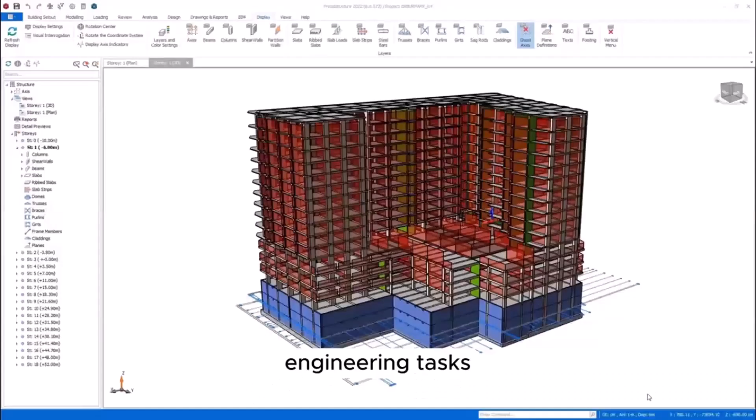Are you ready to discover ProtaStructure Suite? This comprehensive structural engineering software comes with 4 specialized modules, each crafted to efficiently optimize your engineering tasks. We are excited to introduce to you ProtaStructure. This innovative solution is designed to offer fast and accurate analysis and design for your building structures.

Imagine transforming the way you work with ProtaSteel, our groundbreaking tool for automated connection design and steel detailing.

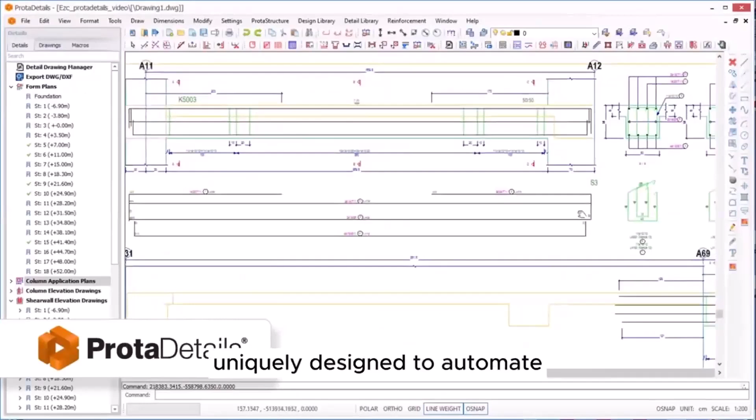That's not all. ProtaDetails is a revolutionary structural drawing and detailing software, uniquely designed to automate the creation and organization of your structural concrete detail drawings. And all of this is achieved with just one click.

And let's talk about collaboration. Our ProtaBIM feature is a game changer in coordinating and sharing project models. It's designed to enhance teamwork and ensure that everyone is on the same page. Minimizing project delivery time and increasing efficiency is central to our mission.

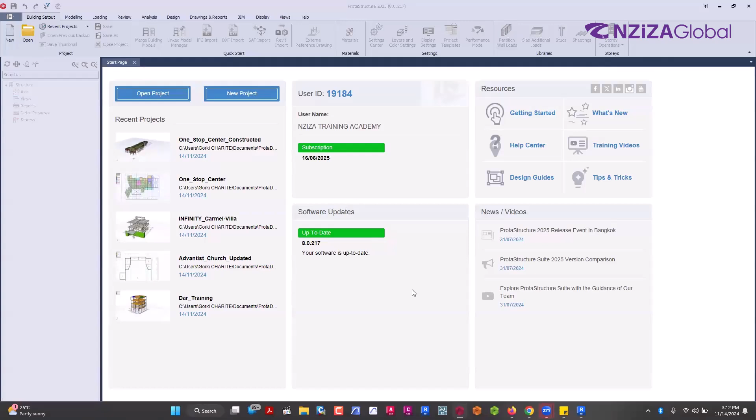Thank you. Okay, good. So we'll be together in today's demo, and I'm going to demonstrate the capability of ProtaStructure. So this is how ProtaStructure opens. This is the latest version, the 2025 version. If you can see my cursor here at the top, you can see that I'm using the latest version, which is 2025. So if there are some participants who are familiar with the software, you can see that there is some change with the new version here.

Okay, so starting here at the top, we have different tabs. You can see this building setout is one tab, modeling is another tab, loading is another tab, and so on. So we have different tabs here at the top, and within each tab, we have different tools depending on the tab that we have opened.

Then here in the middle, you can see we have the start page. With the start page, you can open a project. This is used when you have an existing project in your computer that you want to open, or you can start with creating a new project. Then here we have a list of the recent projects that you have worked on. You will have information about the software update and the licenses that you have.

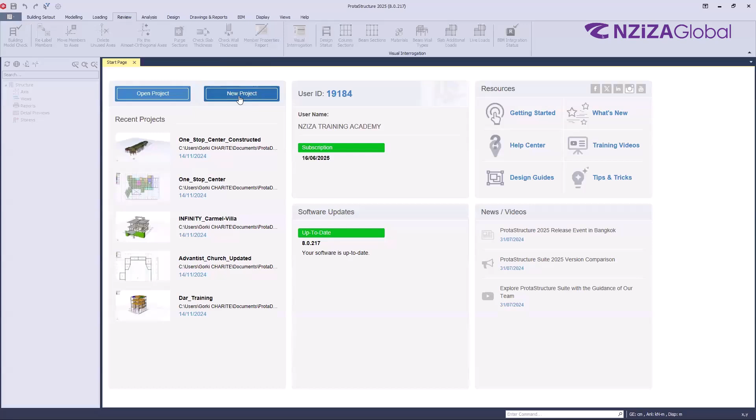So let's start with creating a new project. Just click on new project. You have to fill in the project code or simply the project name. Let me write Zambia demo. Then here in the center, you will see a list of different standards or codes depending on the countries. So you have to select one of the standards that you want to use.

So if you want to select a template standard to use, you have to make sure template is selected here. Then you have to choose. There is also an option to change to project, and you select one of the recent projects that you have worked on. So in this case, if you select one of these, it means you will grab settings from one of the latest projects that you have worked on to the new project that we are creating.

So for my case, let me go with taking a BS code here. So after choosing the name and the code, click on OK. The software will take a few seconds to load a new project. You just have to be patient and wait. Now I have my new project which has been launched here.

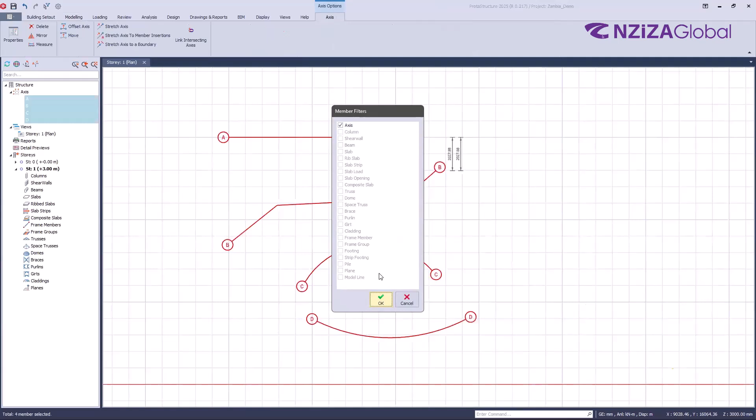You have also another option here to create a grid system automatically using the orthogonal axis generator. If I click on this, I can click on a point. Now I will have to specify the grid in the x-axis and y-axis, direction 1 and direction 2. Let's put the spacings here, and the spacing here also. After setting this, by only clicking OK, I will have a system of grids in just a few seconds. So you see how quick it is to model those kinds of grids.

And for information, if I select the grid, I have modifying tools here at the top. You can offset axis, you can move, rotate, and so on. So you still have the capability to change one of the grids that you have created.

After creating the grid, of course, you have to start creating your members. We will start with creating the column. Remember we are still in the modeling tab because we are constructing our building. So I'm going to model the column. By clicking on column, the column properties tab will open. It will be a matter of just setting the cross section here. I can set the cross section, B1 and B2. I can specify an eccentricity if I wish.

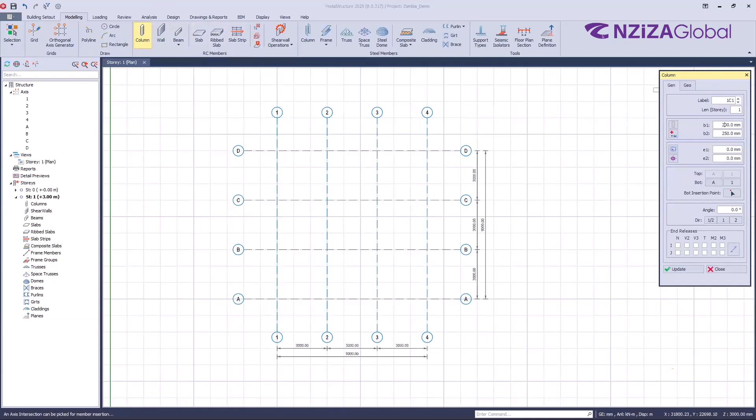Then after specifying these properties, if I zoom, you will see the preview of my column. To place a column, just click at the intersection of the grids, and then your column will be created. If you want to create columns along all these lines, instead of clicking one by one, you can just drag, and the column will be created at every intersection, as simple as that.

It is not just a matter of creating a rectangular one. If you click here, you have other types of geometries that you can create. For instance, if I want to create a circular column, I take a circular section, specify the diameter, then drag, and I will have circular columns.

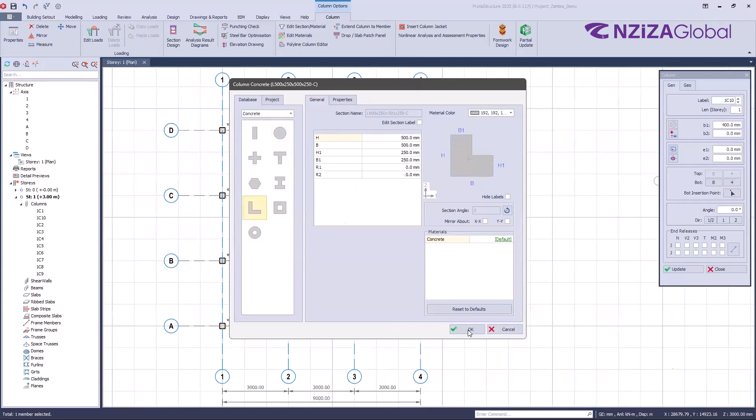You can also choose other types of geometry here. Let's take a look at this L shape. If I click OK, I can come here and place it, as simple as that. I can again go here, and using the section angle, I can rotate. Click OK. If I update, now you see it has been rotated as I wish. Then we have also, let me put another one here.

Let me rotate first, like this. Click OK, update. You see, I have another one.

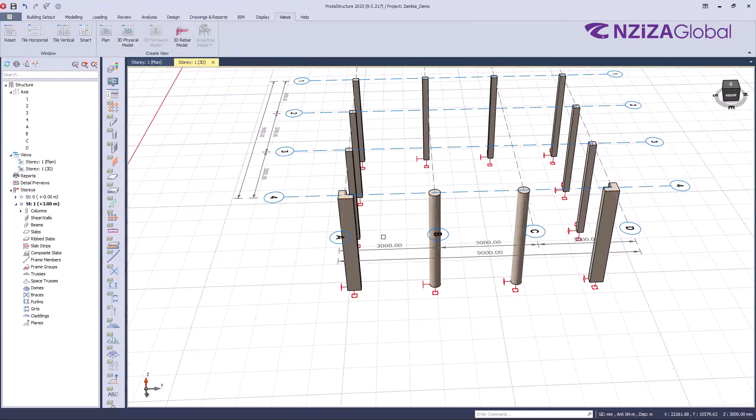Okay. So to demonstrate what we have constructed so far, you can view this in a 3D view as well. If you come to the view tab here, we have a physical model. If I click on physical model, you can see what we have done so far in a 3D view. You can rotate and see. Okay. You can also go back to the plan view if you wish. Okay.

Like so. So when it comes to columns, to members, ProtaStructure is very, very flexible. If you want to create another irregular shape, let me use this arc here. I'm going just to draw an arc here. Let me repeat. Select, I'm going to use the polyline, and I'm going to draw a polyline here, like so.

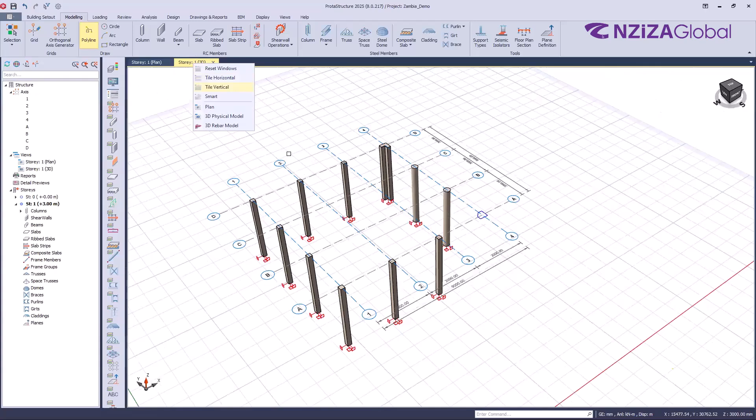For instance, let me delete this column. You can see this is just a line. It is a polyline. It is not a column. If I go to the 3D view, you see it is just a line here. Okay. Again, to view what you are doing in plan view and in 3D view, it is also possible by tiling view. You can see I can view the plan view on one side and the 3D view on another side.

Okay. So what I'm going to do, I'm going to convert this polyline into a column just by selecting, right click. Selecting, right click, then convert to column. If I click, now you see the polyline has been converted to a column. So you can see that with ProtaStructure, we have the flexibility to model the column as you wish.

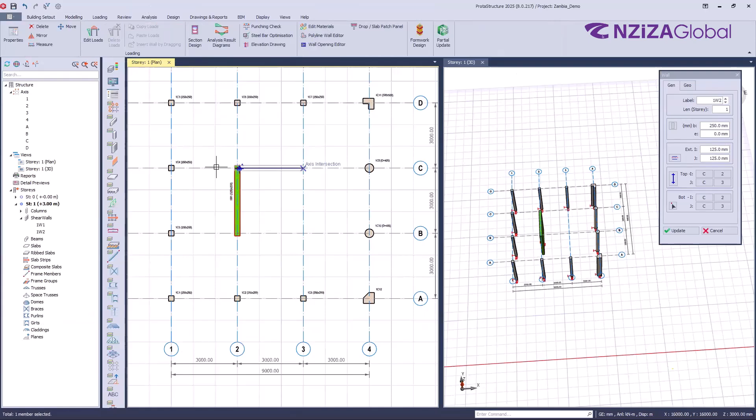Okay. Then the next one is the wall, shear wall. You can also model the shear wall. The procedure is similar to the one of the columns. Again, set the properties here, then start modeling. Okay, your wall. You can see, as long as I'm modeling in a plan view, you can see the effect in a 3D view. Okay, model. You can see that it is very user-friendly. The software is very user-friendly.

Okay. So again, you can do the modification in a 3D view. It is not mandatory to model in plan view. For instance, let's say this shear wall has an opening. You still have the possibility to add an opening. Okay, you can specify the opening size and position using these values here. Okay.

Then let me say it's like a window. You can see the window has been created. I mean the door. By clicking on OK, now in a 3D view, you see that in my shear wall, I have an opening here. So it is very flexible.

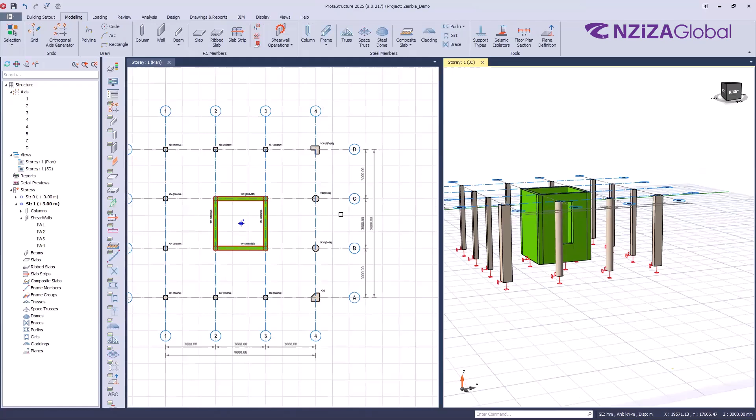Then talking about the walls and columns, it is also possible to create a slant column or wall. For instance, to demonstrate it, if I try to offset one of the grids here, okay, then I'm going to do the modification of this column. You just take a look here in 3D view.

So if I select a column, open property, I can use this bottom insertion to change the bottom insertion, and I have a slant column as simple as that. Okay, just open the column property, using the bottom insertion, click where you want to move your bottom, update, then it will be slanted. This is also applicable for the shear wall and so on. Okay, so you can see that it's very user-friendly, it is very flexible.

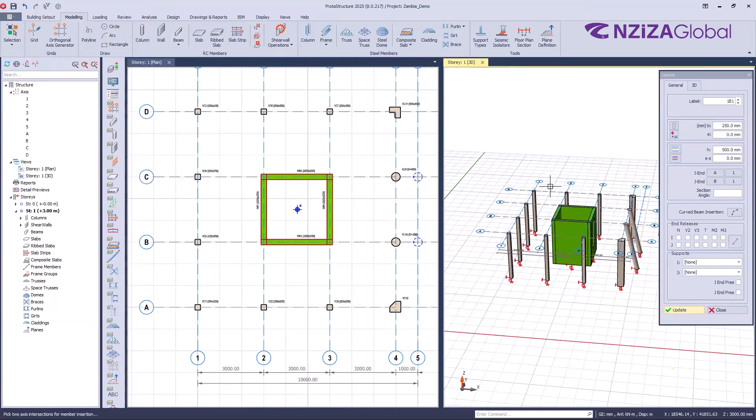Talking about the beam, let's go on with the beam. Okay, again, select the beam. Then you have to set the properties of the beam, the cross-section, the height of the beam, okay, the eccentricity if you wish. Then to model the beam, just select the starting. Okay, let me repeat again. Select the starting, the next one, then you will have your beam created.

You can see that I still have the command active. I can continue to place as I wish. If I want to end the command, I can right click, or escape. Okay. Again, as we have done for the column, if I drag like so, then release. Okay. Then you can place beams in just a few seconds.

Okay. You see now I have all the beams here, and you still have the flexibility to delete or to modify. For instance, if I want to delete this beam, I can select and delete as simple as this.

Just select a member and press delete on your keyboard, or select a member using the delete command here. You'll be able to do so. Okay, you can see in a 3D view what I have modeled so far. Yeah, as simple as that.

So you can also model slabs here. For a slab, you have to select slab. As soon as you select a slab, you will have to first set the load combinations and load cases. Okay, there is an easy way of creating your load cases in ProtaStructure. You can create them manually, or you can use this load generator tab here to automatically create those load cases and load combinations. You can see we have the vertical loads here and the horizontal load combinations here.

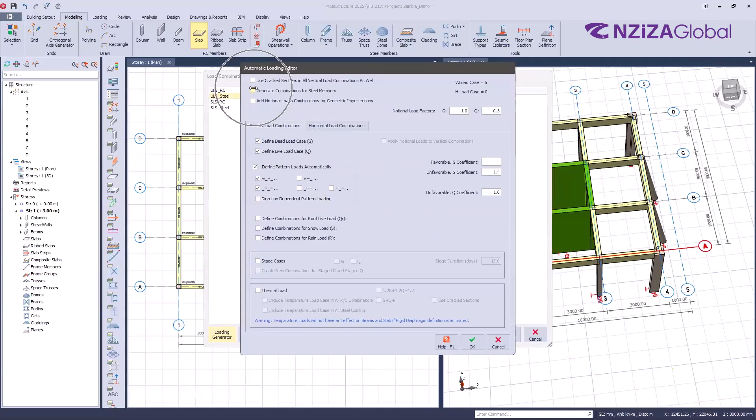If I go to steel, you see it is empty, because by default in Prota, if you use this, it creates load cases only for concrete. So if you want to create load cases and combinations for steel as well, you have to make sure it is ticked here. So if I click OK, now if I go to steel here, you can see I also have load combinations. So let's click on OK.

Now you can see the slab is activated here. So we have to set, of course, the section of the slab. Here at the bottom, you have what we call the insertion method. We have different insertion methods depending on the location of your slab, so you have to pick the appropriate insertion method. Then just by clicking, you see the slab can be placed, as simple as that. Just by clicking, now I have the full slab. Okay, so there is also an easier way of placing slabs.

For instance, let me first of all select these slabs and delete them. To demonstrate that, I will delete all the slabs.

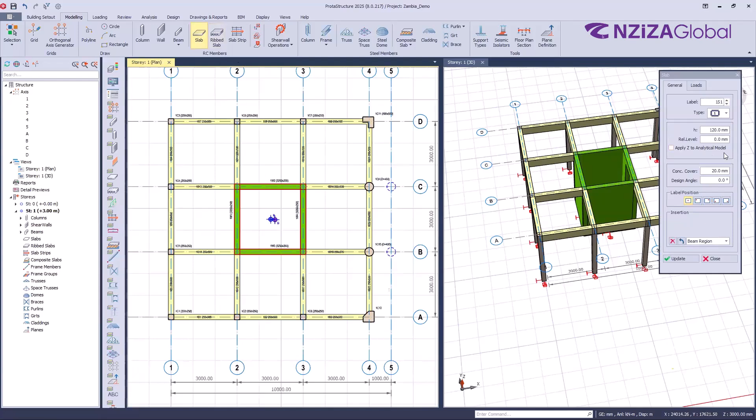Okay, coming back to our slabs, I was going to demonstrate how you can automatically place the slabs without going span by span. It's a matter of just activating the slab. Make sure you have set all the settings. And then here we have a command called start slab automatically. By clicking there, you can see now all the spans have been covered with slabs automatically. This is very, very helpful. So you see that we have modeled all structural members so far.

So if you want to work with stories, if you want to add other floors: by default, when you open the software, you have only story one. See, you have story one here. To add other stories, just go to stories here, right click, then you can insert story. Then here you can insert the number of stories that you want to add. Let me say 3 stories. If I click on OK, we have a warning: do you want to continue? Are you sure? Yes, I do. Then you can see here in the structure tree that I now have up to story 3.

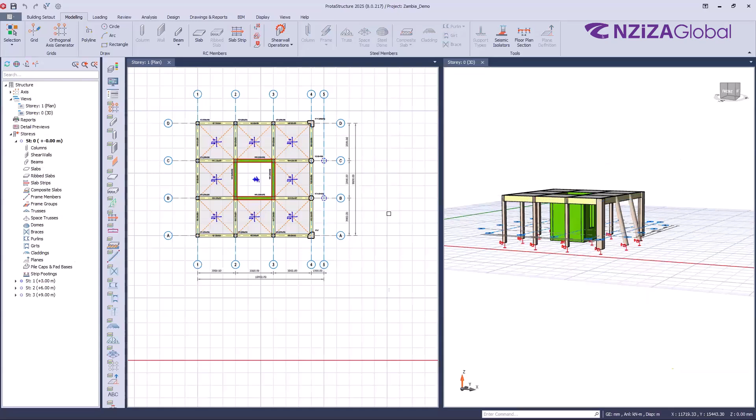To demonstrate it, if you take a look here in a 3D view, you can see that story 3 is the one which is activated. If I double click on story 2, you can see that the grid has shifted to story 2. I can activate story 1. And then story 0 is the foundation level. You can see it here in a 3D view. So let's suppose I want to populate. Maybe I'm designing an apartment or another kind of building where the floors are similar.

So instead of going to the upper story and start creating everything from scratch. For instance, if I open story 2 here, you see I don't have any member, and instead of modeling one by one, I can just copy members from one story to another story. Okay, so how to do that?

I can select all the members that I want to copy, for instance, like this. First of all, let me activate story 1 because I want to copy elements from story 1. So select everything, right click, I will have generate member to other story. Then I can select which story I want to paste to, okay? Because I have selected everything here that I want to copy.

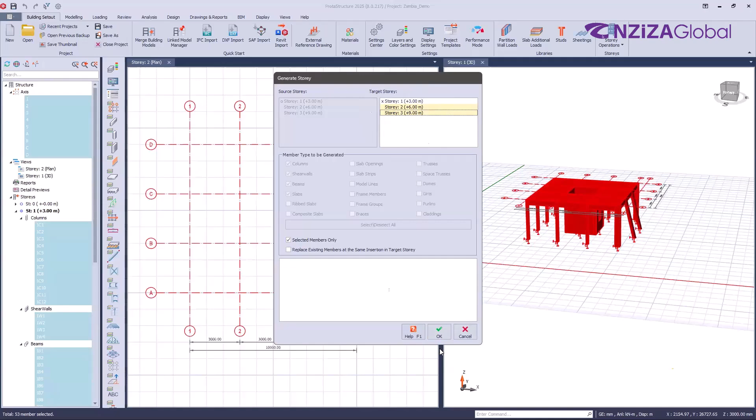Now, where do you want to paste it? I have selected story 2 and story 3. If I click on OK, it means all these members will be copied and pasted to story 2 and 3. So take a look here in a 3D view. As soon as I click on OK, now you see all the members have been populated to the upper stories. Okay, you can see with just a few seconds, and then you have the flexibility to still modify the members as you wish.

For instance, if I select one of the members in a story and delete, you see the bottom ones are still there. So if I decide to delete all these columns, you see that it is not affecting the remaining stories. Okay, so I can come here and place other columns here, circular ones. Go to the column again, choose this one, and put it in. You can see here in a 3D view what I'm doing.

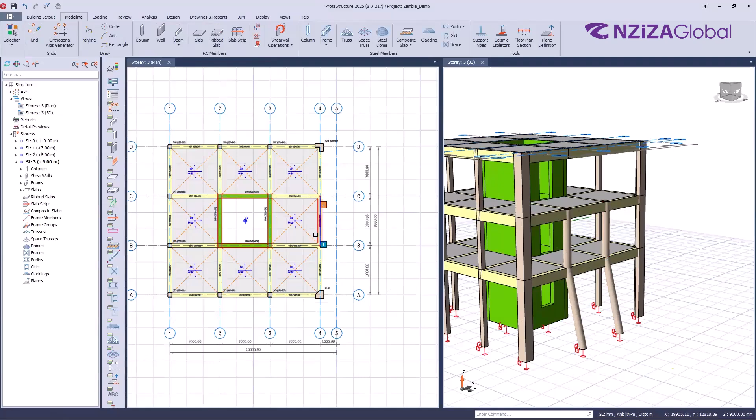Okay, you can go to the upper story 3 and do the same. Place column, place a column. So you see how it is very, very simple and interactive. You can also choose to make stories similar, because you can see if I modify one of the members, the remaining ones will not be modified. For instance, if I take a close look at this column here, I want to apply an offset so that it can align with these beams.

Okay, so you can simply use even the arrow keys on your keyboard to shift the member. You can see like so. Okay, very easy. But if I zoom here in a 3D view, you can see it is not affecting the stories below. But there is a way in ProtaStructure where you can define stories to be similar. If I select story, right click, under edit story, here you can make stories similar. So I'm going to select all 3 stories and then define them as similar here.

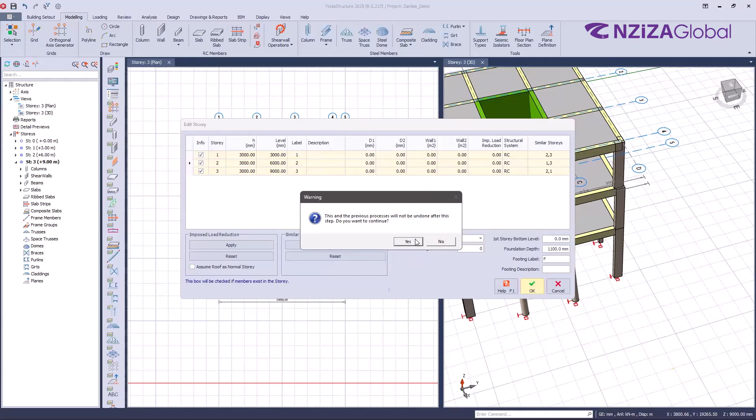So I will have this pop-up: which story do you want to take as a reference? I pick story 1, you can pick any one of those. Then I click on yes. Now you see that the columns that I deleted before have again been slanted, because I have chosen to take story 1 as a reference. And in this case, if I delete one of the columns, it will be deleted on all the remaining stories. This is because I have set the stories to be similar, okay?

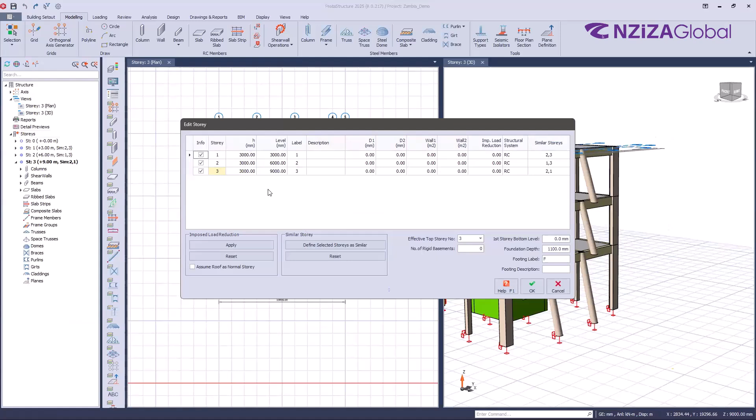And don't worry, you still have the possibility to come back. Just make sure that you reset the stories not to be similar. So before I reset them, I want to apply an offset here. You can use the arrows, or you can come to the properties here and put eccentricity. You see eccentricity in both directions. Maybe let me try this and see. Yes, I want my column to fit in very well. In this case, I have only changed story 3, but the remaining stories have also been adapted.

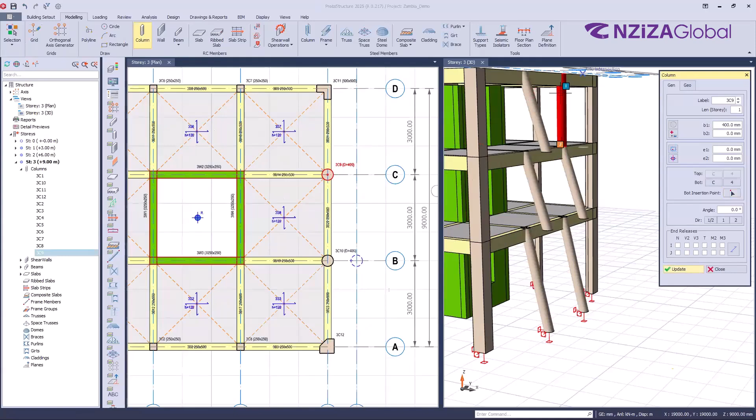Maybe I want the bottom columns to remain slanted, but the ones above to be not slanted. So back here, I want to reset, select all, then I will reset, and click on OK. Now, in this case, if I change one of the members, it will not affect the remaining ones. For instance, modifying the bottom here, you see I have only changed the one that I have selected.

You should always remember to update. So if you have done any changes, you have to always update here so that the change may take effect. Okay, bottom, update, and so on. So you can see that it was very quick to model such a thing.

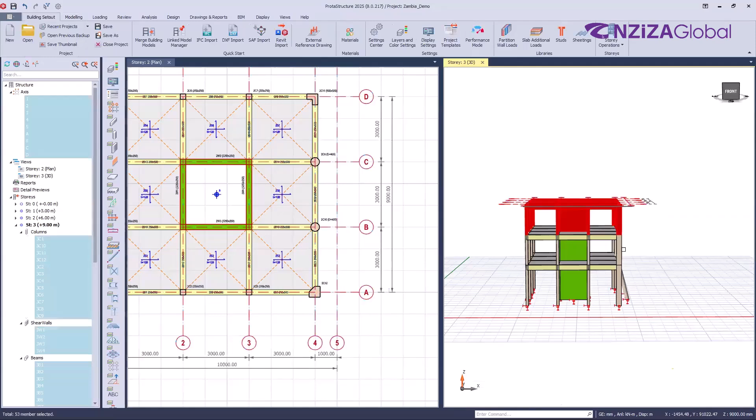So this was about the members of the reinforced concrete. You can also model steel. On this side here, using these tools, you can also model steel. To demonstrate it, I'm going to delete this upper floor. Instead of deleting everything, I will delete only column, slab, and beams. To do so, I can use the filter command. We have a filter command here.

Open it. I want to select only columns, beams, and slab. I want the shear wall to go all the way. So in this case, if I select, you can see that the shear wall was not selected because it was not ticked here. So I will use the delete key, then delete, close. Now I'm going to try to model steel members on this story.

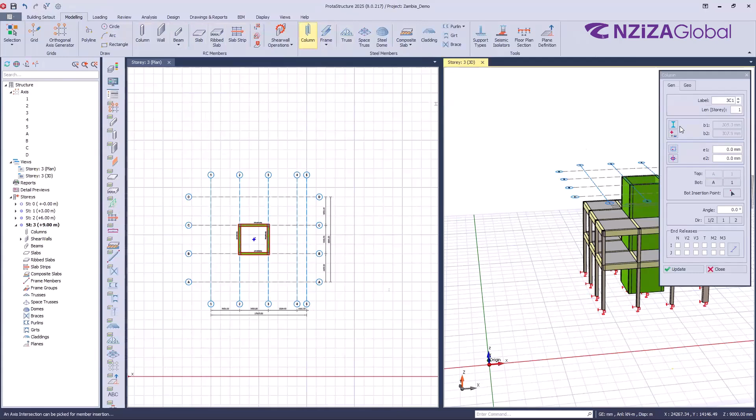So still I'm in the modeling tab. Now I will use the steel members here. Start by column. Again, you have different sections of the columns here. You can choose between different codes. Here you can use the British, the Euro. So you have a possibility to change any section here. I will still use the I section. You can use L section. You can use the hollow tubes here. You can change here if you want to use the concrete, the steel, the built-up, and so on. So I'm using only steel.

Click on OK. Then if I click here, repeat again. If I click, now you see I have a steel column. You can see the same here in a 3D view. I can also drag like so, place. Like so. Just drag. With just a few seconds, you can see how I have modeled the steel column here at the top. Good. You can still go and model even other members.

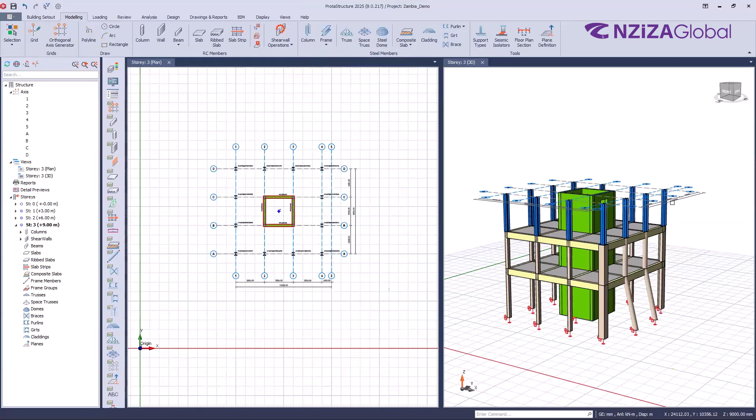Let's say I want to model a frame member. By selecting frame member, you have different members. You can have a steel beam. You can model the primary and secondary beams of the composite slab if you wish, and so on. So let me use, for instance, this beam. Again, let me use the 3D view, because you can also model in the 3D view. So I will take a steel, select the first point, second point, click yes. Now you see the beam model here.

I can do the same here, for instance. As simple as that. You see you can model in plan view or in a 3D view. It's up to you. You can also model trusses if you wish. So I will use now the plan view again. To model a truss, just click the truss command, select the first point, the last one. Then you will have this dialog box where you can choose different types of trusses. Let me choose this one. You can choose different patterns.

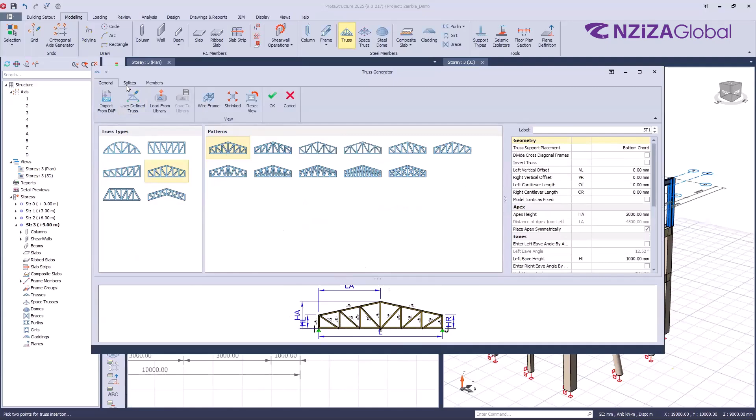Here on the right side, you have different properties where you can control your truss. Do you want to add a cantilever? Do you want to modify the top and the bottom chord? Do you want to apply an offset and so on? Everything is controlled here. You can come to this splice tab and add some splices. You can go to the member tab where you can change the sections. Like what we did on the column, you still have the possibility to change section.

Then after setting everything, if you click on OK, you'll see your truss has been modeled in plan view as well as in a 3D view. And you can see that I still have the truss command, so I can continue and place on other nodes. Like so. You can see in a 3D view what you have modeled so far. You can also model domes, composite, and so on. Very simple. You can also model purlins if you wish. Purlins, it's a matter of selecting the first truss, selecting the second truss, and you'll have the properties related to purlins.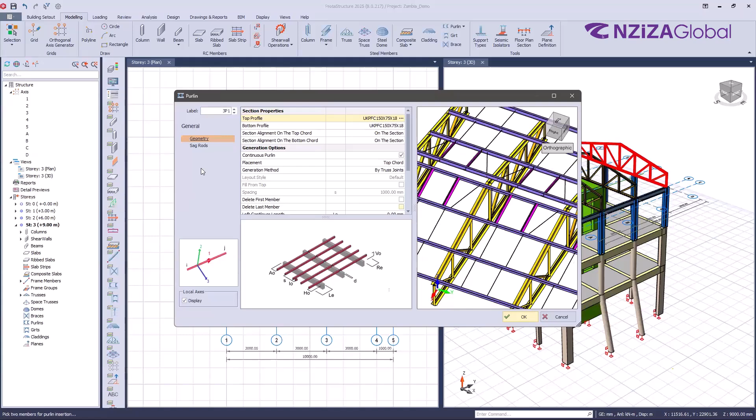You can always come here and change the section of the purlins if you wish. Okay, you can make some modification. This is a 3D view. You have an interactive view where you can view the changes which are being made. Okay, you can control the sag rods if you want to apply sag rods. If you don't want, you can remove them. For instance, you can see I no longer have sag rods.

If you are happy with your model, just click on OK. Then we will have your purlins modeled here. Okay. You can model girts. Okay, just select one column, select the last one. Then, like we did for the purlins, if you are happy with the setting, click on OK. See, I have modeled girts here.

You can do the same. The first column, the last one. Okay. And the good thing is, as long as you have set the settings, the next time you are going to use the same command, the software is intelligent enough to have retained the last settings that you have applied.

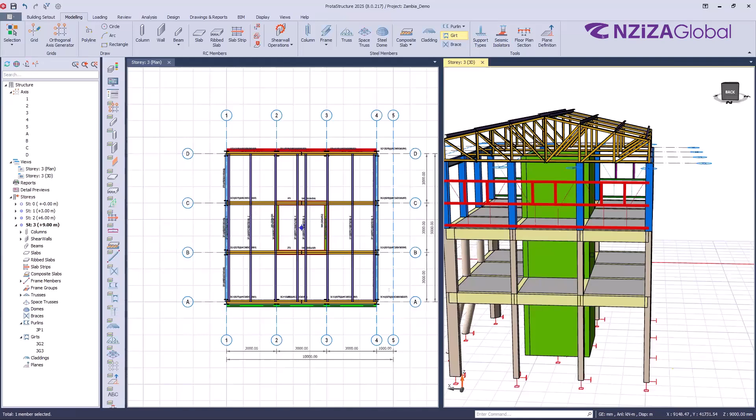You can model the braces if you want. Okay, if you want to brace two columns, see, again here we have different properties that you have to set. You can change the type of braces. You can use the V brace, you can use the K brace, or even the X brace, and so on. Set all here, then click on OK. You will have all here.

Okay, you can also apply a cladding to the top, to the roof here, by simply taking the cladding command. Okay, then select the purlins that you have created. Then the software will automatically create the cladding for you. Click on OK, and you will have something like this.

Okay, so I will reset this. Try to zoom what we have modeled so far in just a few minutes. Okay, you can see how the software is very, very user-friendly. How modeling is very, very simple. So if you are done with modeling, of course, you have to go to the second tab and start loading.

Okay, you must create the different wall loading. You have different types. These are the defaults which come with the software. Okay, you can create your own type of wall if you wish by using this plus here. Then you can also create the material. Okay, if it is composed of blocks, is it bricks, does your wall have a plaster, and so on. So you can apply all of them here.

For a certain case, if you don't see your material on the list here, you can always come to edit and add your own material. Okay, so you can do the same for the slab loads. Okay, for the slab loads, if you want to apply additional dead loads to the slab, you can use one of these, or you can customize them, or you can create your own using this add here.

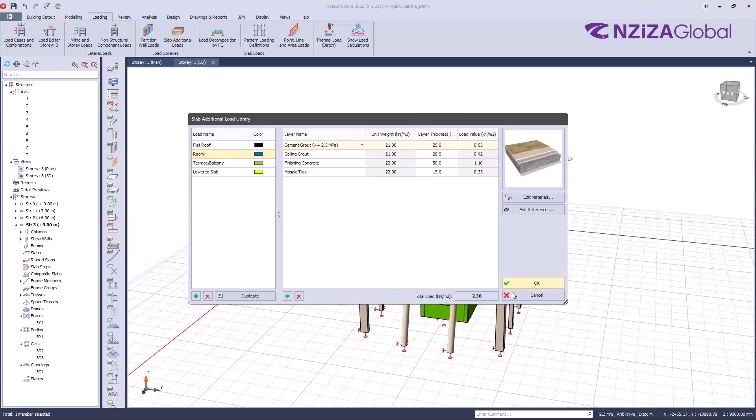So after creating these two loads, the wall load and the slab load, now it is time to assign them to your structure. Okay, so you can do it in a 3D view or in a plan view. Let's start by applying load to the beam here, supposing that this beam is carrying a masonry wall load. So just select it, go to edit loads. So you see, you can assign different types of loads here. You can use the point load, you have uniform loads here, and so on.

So let's take an example of these wall loads here. By just selecting wall loads, I have to come here and select one of the loads that I have created. Okay, pick one. Then you have to choose the height of your wall. By using this first option, you choose the height of the wall. By using this second option, you have to choose the beam which is above the wall, then the software is intelligent enough to calculate the height. Okay, so we're using 500.

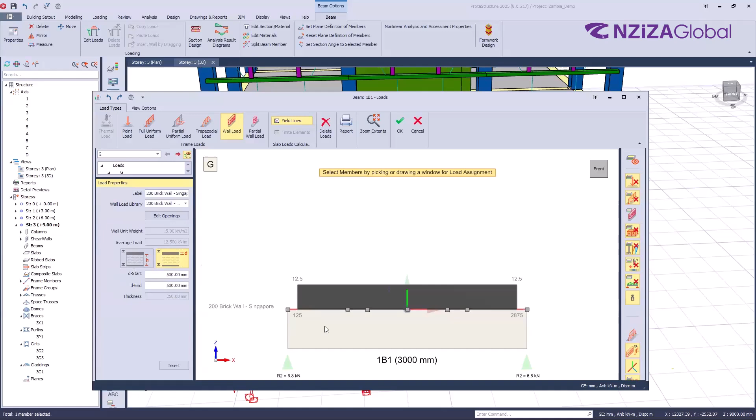Okay, so by clicking OK again, now you see this red color, which is showing a wall load which is being applied on this beam. Okay, so if I go to the plan view to demonstrate it, you can see again that now here my beam has been changed to red color, meaning that I have assigned a wall load.

So you can assign a wall load like this, or you can copy and paste, supposing the remaining beams have the same wall load. Just select a beam to copy a load. You can right click and copy loads, or you can simply click Ctrl+C on your keyboard. Then select the beam where you want to paste, click Ctrl+V, and the load will be pasted there. In a 3D view, this is how it is looking like.

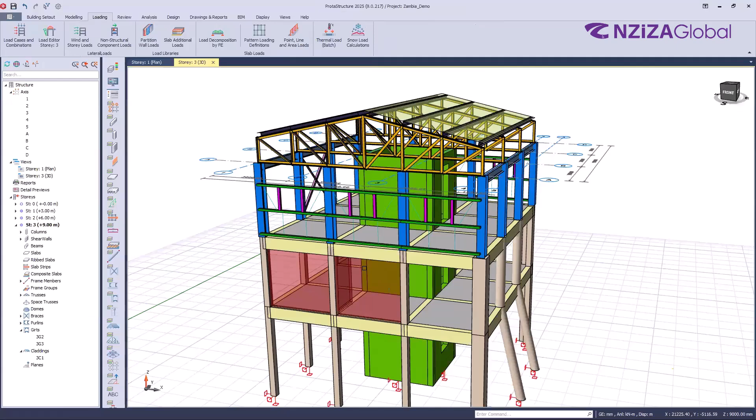You can place a wall load on a beam by just dragging, supposing that the wall is not starting from the start of the beam to the end of the beam. Select a beam and use insert wall by dragging. In this case, you can drag to a certain point. You see the wall does not fully cover the beam. If I go to the 3D view, you can see that the load here is just on a portion of a beam. So you can do the same, copy the wall, and then paste to all.

So by selecting all beams, click Ctrl+V, as simple as that, then it will be pasted. You can see all the beams here. You can do the same for the remaining beams. Let's go to the above story, select all, Ctrl+V, then they will be pasted there, as simple as that.

You can also place walls on a slab, because there are some walls which are sitting on a slab. Just select the slab, again go to edit load. By going to edit load, you can add wall loads. So you can choose the wall load. You can use the insertion here to put the wall load. So it's a matter of choosing the X and Y direction here.

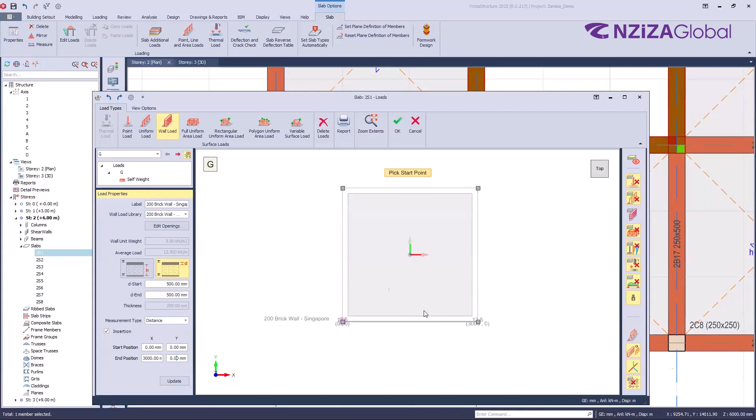Let's say the wall is starting here, ending here, if you are seeing my cursor. So the X and Y value at the start will be 0. At the end, the X will have a value, but the Y will be 0. Okay. Now you can see that I have a preview of the wall.

You can come and select the wall. If you want to add an opening in the wall, add openings. You can add openings like a window, for instance. Click on OK, then update. Now you can see the preview of the opening in the wall, and so on. So you still have flexibility to work with different loading.

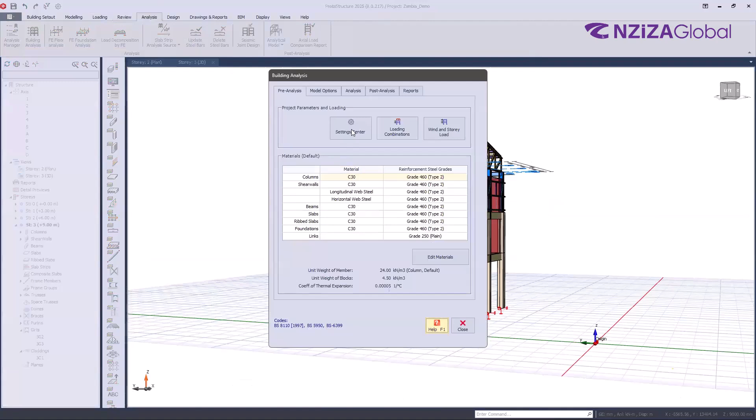After loading, you must go to the review tab. Under the review tab, you have to double check if your model has any modeling errors. So I will go to the building model check. You can see I don't have any errors so far. Then I'm ready to go for the analysis. If I go to the analysis tab here, I'm able to run the analysis. Before running the analysis, you may set different settings if you wish. For my case, I'm not using the earthquake code. If I want to apply seismic, I will have to come here and activate it.

You can come and change the rebars here, which diameters of reinforcement you want to use. You can change the materials, the grade of your concrete, before going to the analysis. Then you can set some settings related to the model, related to the shear wall, related to the slab model, and so on. If everything is set, then you go and run the building analysis.

I'm going to run the building analysis very quickly. I have to wait. The software will be calculating all the loads that you have applied to the members. It will take time depending on the size of your project. Mine is done, and you can see the green tick here. Then click on close. You can see here that the building analysis has been completed.

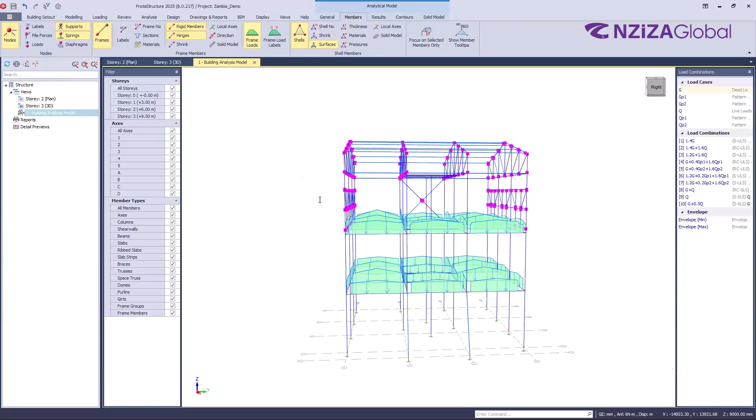So I can go and open the building analysis model to check some of the effects of the loads on my structure. If I go to the member here and activate the frame loads, you can see how my loads have been decomposed to the beams here.

Okay, you can use the filter command here to choose which story to be activated, and you can choose the load cases. Here you are analyzing how your loads have been decomposed to the beams. You can activate the frame load to see the value, and so on.

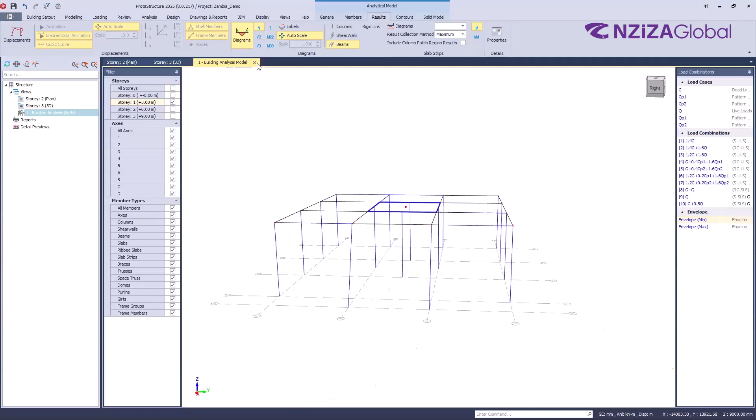You can go to the result tab to activate some of the diagrams here. So if you are done with investigating all of this, you can close, and you are ready to go for the design. So under the design, let's start with the column design. Going to the column, I can click on one of the columns to do the design.

But before going to the column design, we have settings here. You must make sure that you have everything set. For your columns, you have different settings here. You must double check. For instance, you can see that the minimum column bar size is, let's say, 16. So you have to change these settings first. Then after that, you can go for the design. You can use the interactive design.

Then the software will automatically, depending on the load and the section of your columns, provide the reinforcement. If I click on OK, now you see the design status is passing. I can copy the reinforcement from one column to others. Click copy. If I click paste to all, now the reinforcement has been placed to all the remaining columns. You can see the design status here is okay.

I have another type of column here, the ones which are circular. I can again go to the interactive design, click OK, copy reinforcement and paste. See, now they are passing. We have those columns which were polyline. Remember the L column. So we have default reinforcement. If I go to interactive design, now the software will be able to place

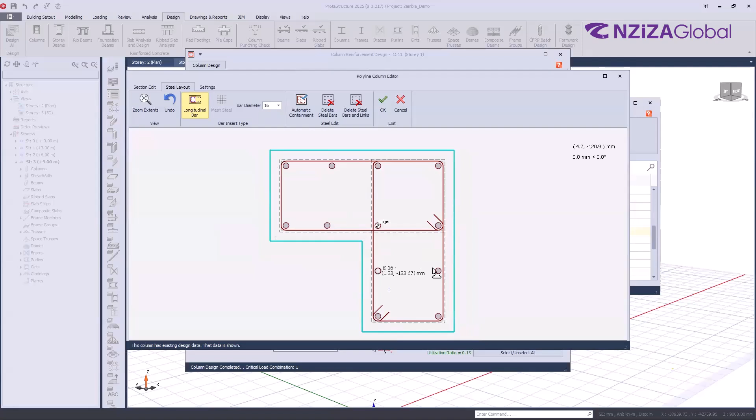If you want to add a tie beam, you can do it. Then if you are satisfied, you can do the interactive design. Then the software will let you know if your column is passing or failing. Again, copy, paste to all. You can do the same for the remaining columns. Again, I will copy and paste to all, and so on. So you see how it is very flexible.

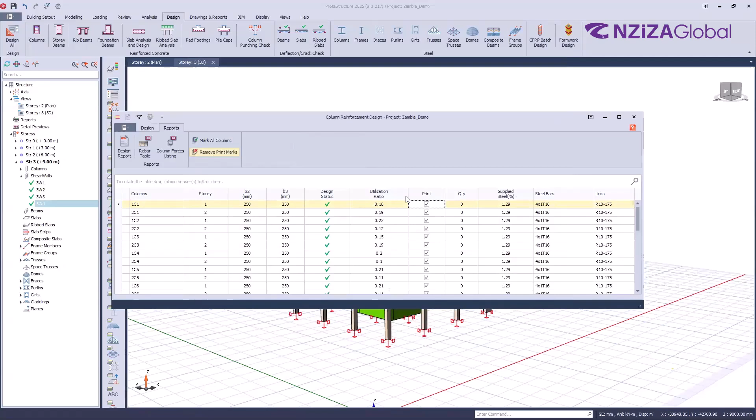You can also do this one by one, but you also have a batch mode here, where you can use the batch mode to design all the columns at once. Select reinforcement. Instead of doing what I was doing one by one, now you can see that all have passed. Again, while we are still here on column, you can decide to make a report. Report here. So I can decide which column I want to have in my report.

Create a design report. Excuse me, Engineer Gorky. Can you share, please? Yes. Sorry. The screen. The screen is visible. The screen, I think, you can see. Okay.

So you can create a report for the columns here. Let's go for the story beam. It is the same as we did for the column. You can use this interactive design to design your beams here. You can go to the settings here and set all the different settings related to the beam before going to the design. So you can design one by one, like so.

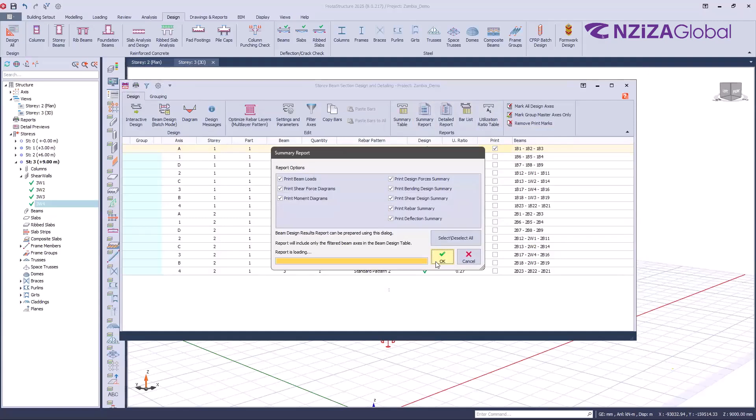Or you can use the batch design here to select all at once. You select all. With a few clicks, now you see the beams are all passing. Again, using this print column, you can decide which beam you want to appear in the report. You can create a summary report, for instance. Let's view it. Summary reports.

Just wait. See, I have a summary report of the selected beams. Everything is here. You can always save it as a PDF or as Microsoft Office. If I save now, you see I have a PDF of the reports.

Let's go on. So far, what we have designed is the columns and beams, and you can view them using a color code here in a 3D view. Come here in the review tab, open the status. You see, what I have designed and is passing has green color in the region you are seeing here. The ones which are still white are not yet designed.

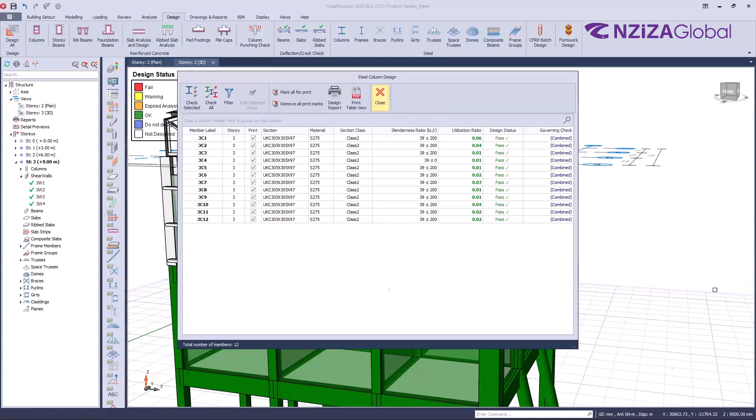So again, if you want to make a report while you are still here in column design, you can always create a design report. Okay. If you click here, you can always make a design report, and then you can save it as we did for the remaining. Okay. So you can see how easy and user-friendly it is to use ProtaStructure.

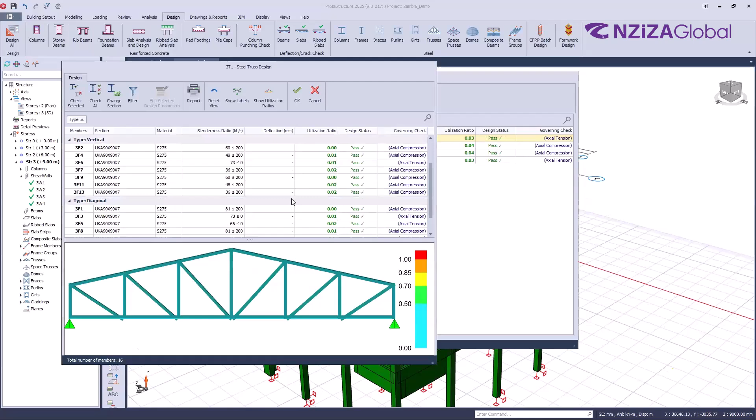You can come and design trusses. Okay, for instance, see I have trusses. You can design it like so. If you want to investigate further, you can always come and see all the details here. Okay, right. Again, you can create reports if you wish. Creating report, save it. You can see if everything is passing here.

Okay, so you can save it as well, and so on. So you can design, you can model everything here. So because of the limited time, let's jump to the footing first. How to create footings. Okay. So you must come to story 0. Just select one of the columns and click insert pad footing if you want.

Yes. Engineer, you are answering the questions you have in the chat box. Someone asked how you analyze slabs, talking about finite element or trapezoidal things like that. I think before you go to footing, it's better you analyze the slabs so you can see that as well. Okay, thank you. That is Kalolo, so I request him to follow.

And his first question was slab modeling. What slab load transfer model are you using? Is it analytical finite element or simplified trapezoidal or triangular? So that is what you're going to answer now. His second question, about how you validate your model to ascertain the correctness of your modeling, is already answered. And your next step will be on footing.

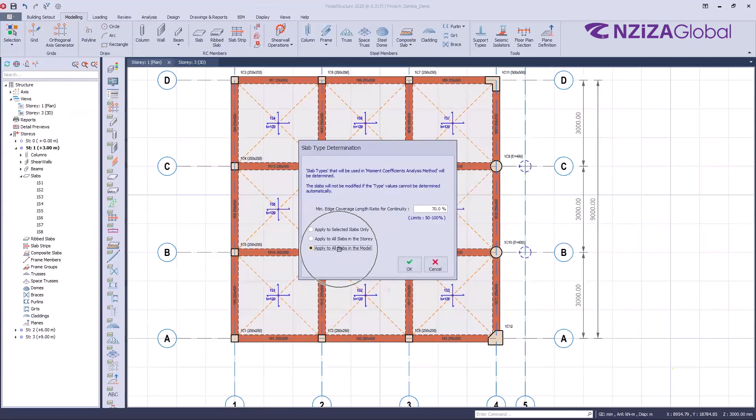So I will use it. You have these three options. Then I will choose the last one. I want to apply these settings to all models. Click OK. Then OK. If I come back to the slab, the one that I selected before, open the properties, now see it has been changed to type 4, which is the right type of slab. So if you are using the moment coefficient method, this will be a step that you will need to do.

The second one, under the analysis, we have the finite element analysis method. Okay, so if you want to mesh your slab and use the finite element analysis, you must make sure you are using this. Remember the moment coefficient method, the one that I explained first, is only applicable when we have this type of regular slab. So in case you have an irregular slab, you have to make sure that you run the finite element analysis. So to answer your question, yes, by default, we have a moment coefficient method, but you can also mesh your slab and use the finite element analysis.

So coming to the design. To design the slab in ProtaStructure, you have to use what we call slab strips, and they are found in the modeling tab. Remember you have to do this after doing the analysis. My analysis is active. Come and activate the slab strip. We have analytical strip, and we have the finite strip. If you have used the moment coefficient as I did, I will be using the analytical strip. If you have used the finite element analysis, then in that case, we will use the finite strip. So I'm using the analytical strip.

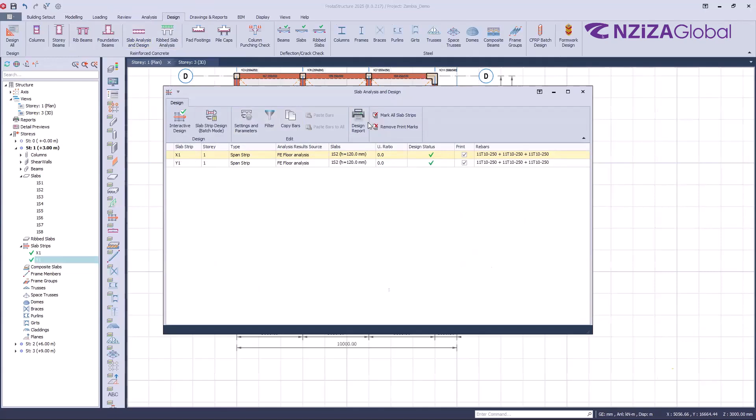So to find the report, I come to the design tab here. Make sure I go to the slab analysis and design. You will see the strips, the two strips that I have created in X and Y. Click on the design report. Then you will have a report of the slab, with the deflection check, with the reinforcement here. Again, you can save it as a PDF or as a Word document. So that's how you can design a slab.

So if you are using the finite element, it is the same method. What you have to keep in mind is that when you place the slab strip, you'll be using the finite strip here. So that's it. Let me jump to the foundation now. When you want to design the foundation, of course, you have to make sure that you have designed the superstructure. You have analyzed, you have done everything. You have an active building analysis here.

Again, here you can model. If you select one of the columns, you can insert a pad footing, or you can insert a pile, depending on what you want to achieve. So I will insert the pad footing. Just select. Remember, before doing this, of course, you have to make sure that under the settings, under the foundation settings, you have set all the parameters, the soil parameters. Here is where we set the soil parameters, the unit weight, the allowable stress.

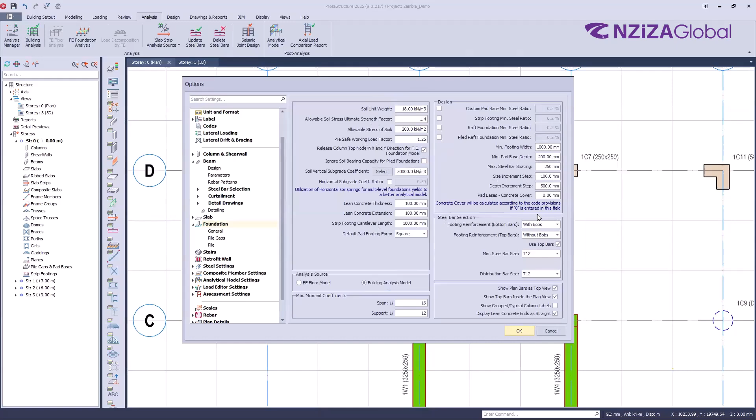We have some settings here related to the footing. You have the minimum base. Let's use 200 for this. The depth increment, use 50. So you may come here and change all the settings. Then if everything is okay, you can come and insert a pad footing. By inserting a pad footing, you see the software will design the footing automatically.

You see here, the design status is passing, okay? Here you have information. You see here I have a concrete cover, which is not correct. That's because I didn't set it in the settings. I can change it, make a design again. Now you see I have reasonable sizes. Okay, you see 200 and whatever.

You can add a pedestal if you wish. You see here, like when you are designing a footing where you place a steel column. ProtaStructure can do that. You can come here and change the settings related to the materials. You can come here to the loading, column loading. You can investigate the loading from the columns. You can come here and change parameters related to the

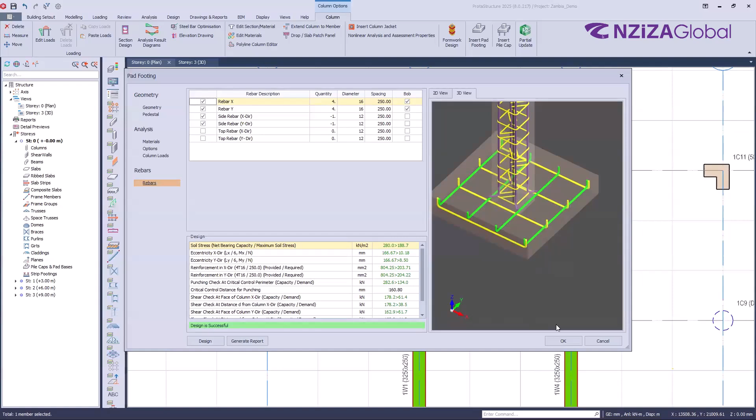reinforcements, okay? So you can even view the 3D view here of your footings, how it will be looking like. Okay. So if you don't want to use the top rebar, as long as you deactivate it, you see here, I no longer have top rebars and so on. If everything is okay, you can again create a report here, save it, okay.

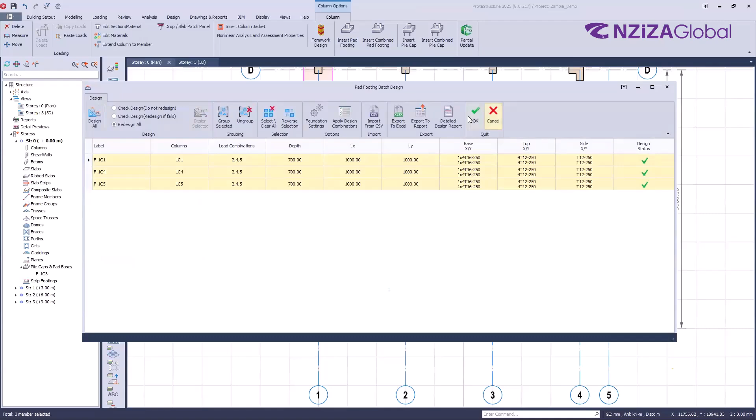Then click OK. By clicking OK now, the footing will be created. You can create a footing for multiple columns at once. You can select multiple columns and insert pad footing again. These will be the same. I can come here and use the select all and redesign. You see the status has been changed. If now I click on OK, now every column will have a footing and so on. So you can do the same, okay?

So let me jump to the remaining part because I see time is somehow up, okay? You can do the same if you want to add a pile. Okay, it is the same procedure. So if everything is done here, let's create the report for the pad footing first. You can come here and click on detail report here. Let's save it. Okay, so it is very important to save those reports because we will have to combine them later.

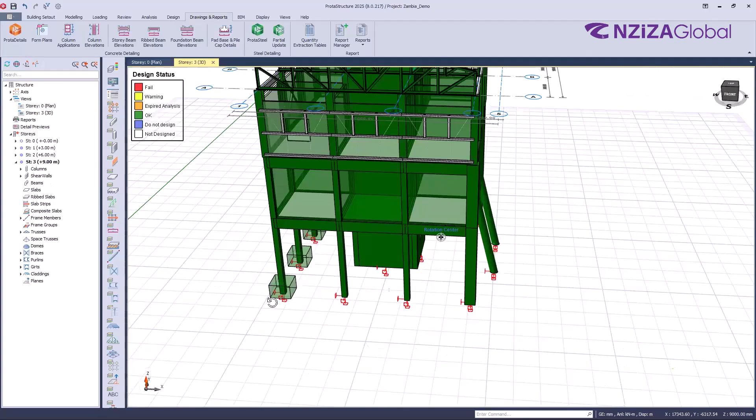Okay, now you have modeled your building, you have analyzed, you have designed, and so on. Now it is time to go for the reporting. So under the reporting, you will use ProtaDetails to report reinforced concrete members, and you use ProtaSteel to do the steel connection and drawing and production of the steel members. Remember the truss here. We analyzed they are passing, but we didn't design the connection between two members of steel. So if you want to do so, you will come here.

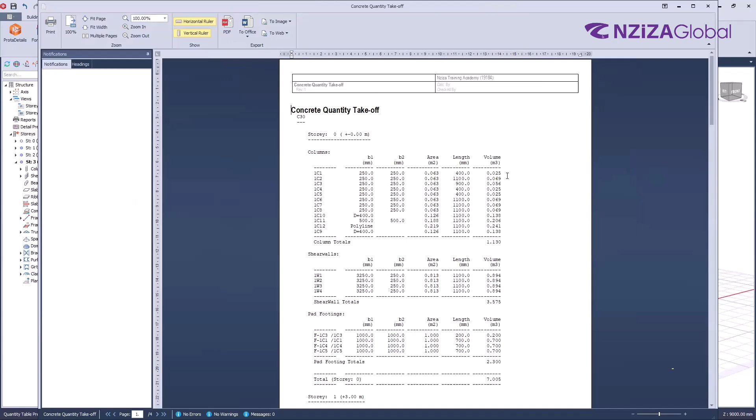So before going to ProtaDetails to show you how you can detail, here we have two important reports that are available in Prota. Quantity extraction. You can view all the concrete within your model, okay? If I create a report, this is a detailed report for the concrete takeoff. You see for the columns, it's giving you the sections till the volume, and all the way down here, it is giving you a summary of all the concrete in cubic meters, which is a very, very helpful report.

You can also view the report for the formwork, okay, in square meters. Okay, again, these are details. If you go all the way down, you have again the summary of your formwork reports. Okay, then that's all about the reports. Let's launch ProtaDetails for detailing. You want to save? Yes. Then you have just to wait a bit so that ProtaDetails may launch. Okay. It is loading.

So this is the interface for ProtaDetails, where we are going to detail. So we have two options. You can detail manually, if I can say, where you have full control of choosing which member to detail by starting by creating a new drawing. Or we can use the auto-generate details, okay, where the software will automatically generate all the drawings for you. Here are some of the settings that we have to go through before generating the drawings. We have settings related to the plan view, to the column application, to elevation, and so on.

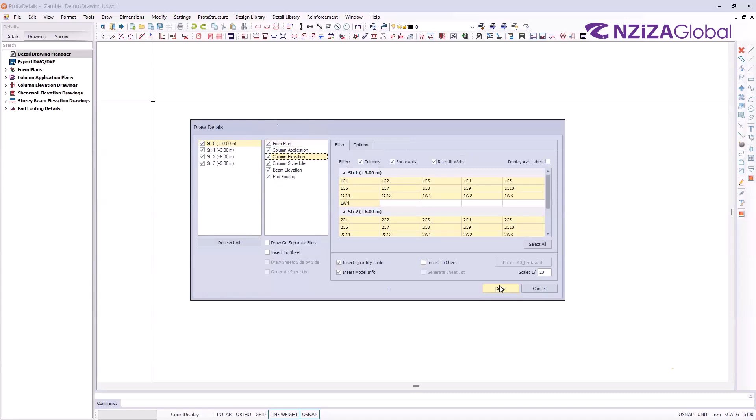So if everything is okay, just click, and then the software will automatically start generating all the drawings for your members. Okay, this is one of the best features of ProtaStructure because it analyzes, designs and details member by member. Okay, you see I have a bunch of drawings here, starting from where I created the footings here, the plan view. You can see all the plan view. I have the column applications here.

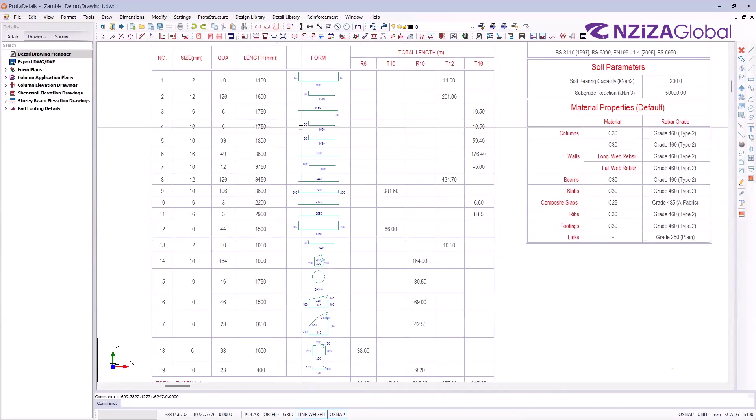Okay, you can see we have the column application quantity takeoff, where we have the bar bending schedule, very, very important. ProtaStructure is able to produce this bar bending schedule, which is a very, very good feature. You can see how it is detailing the shear wall, the cross section of the shear wall.

You see the slant column that we have created. All the detailings are available. Column elevations here. You can see the detailings about the beam, even the cross sections. Everything is there. You can see the footing that we have created.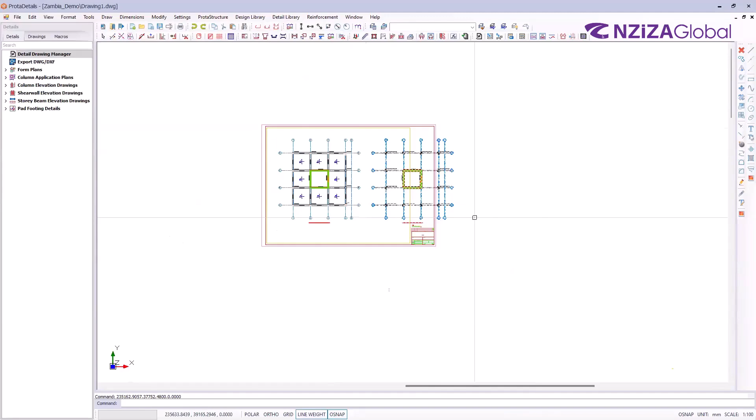Okay, the good thing about it, you can even insert sheets. You can come here and choose one of the sheets. For instance, if I choose this sheet with a title block, you can always move some members to sheets, like so. You still have the possibility to adjust. All right.

So I want to show you one of the best features when it comes to quantification in ProtaDetails. For instance, if I take an example of this column, just by selecting this column, I want to know the quantity of reinforcement in the column. Just select one of the members, right click, you see quantity table. If you click on OK,

now you see I have the bulk bending schedule, the quantity table with the size of the reinforcement, with the quantity, with the form, the unit weight, for only the selected member. So you can do this for the columns, you can do it for any of the members, which is a very, very useful feature.

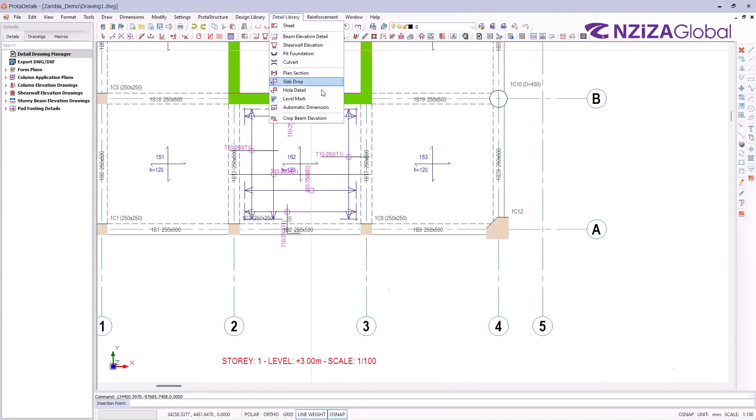So you can come here and view the cross section of the slab. Under the detail library, you can see plan section. Here it is. Make sure that ortho is activated, so you can make a cross section. Now you can view the section of the slab with all the reinforcement, with all the details included.

You can use these detail tools here, because in ProtaDetails we have other details. You can detail a culvert, for instance. You can detail any given beam. You see how this is a very, very helpful software. There is another cool feature. For instance, you have a sheet.

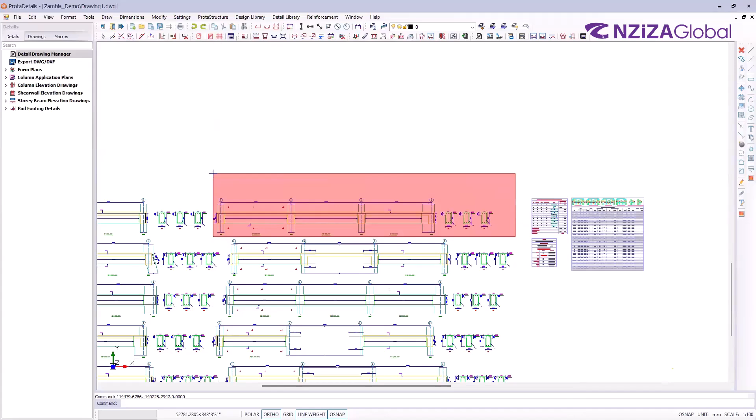Let me create another sheet here. Now I want to put this beam on a sheet. I will select it and use the move command. So if I bring the beam to the sheet, you see how the beam is somehow very long. So to detail this and put it on one sheet, you can use what we call the crop beam elevation. Just by taking the command, you can make a crop and bring the remaining part of the beam beneath.

So you can see how you can customize all of this. You can insert one of the sheets which you have customized. Let's open one customized sheet. So you see how this sheet is customized. I have added some notes and whatever, so you can add your own sheet.

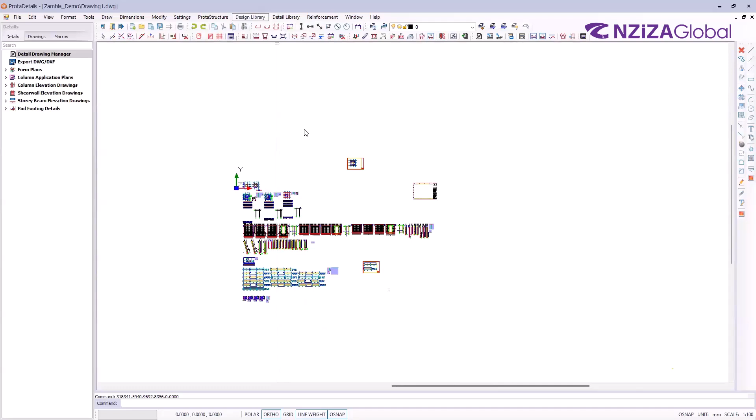So coming to the design library, you can design cantilever retaining walls if you wish. You see, this is a cantilever. It's a matter of just filling all the information about the soil parameters, the fill parameters, and so on. And then you can come here and generate the report. The report is loading. See, I have a report for the cantilever. You can also save it. Close.

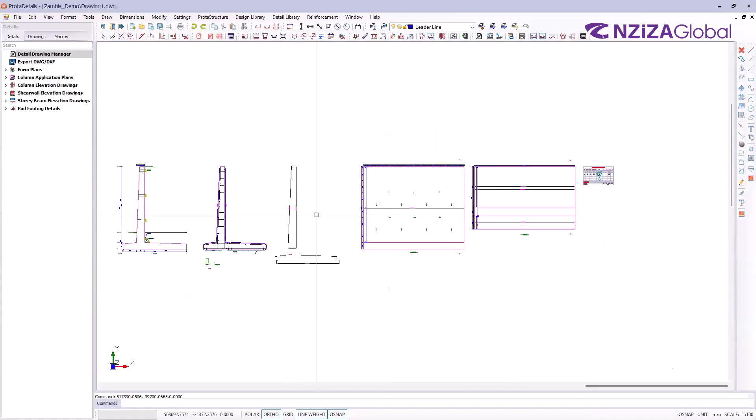After this, you can prepare drawings. Just come and pick. You'll have all the details of the cantilever retaining wall. You can use it to design with the remaining tools here. The time is up. I will not go through all this, but just be aware that you can design all of this. You can design the stair, the retaining wall, the culvert, the pad footing, the swimming pool, and so on.

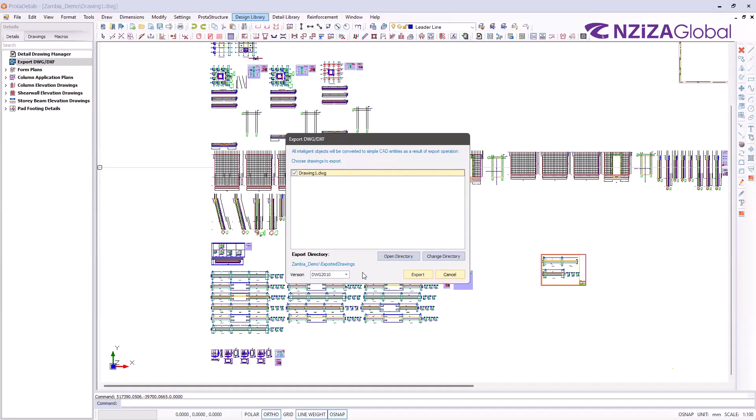So to conclude the demonstration, I want to talk a little bit about the BIM capability of the software. Even though you have generated all these drawings in ProtaDetails, you still have the capability to save them as a DWG. DWG is a file which can be opened by many other softwares, like AutoCAD; ArchiCAD can open the same file, so you can always export it as a DWG.

You can come and save your work as a PDF if you wish. For instance, this is how it is done.

You can save it as a PDF. Now, talking about BIM, you can now exchange information from ProtaStructure to external software like Revit, for instance. So if I come back to ProtaStructure here, you see the model that we have modeled. If I come to the BIM tab here, you see you have many tools you can use to exchange your information.

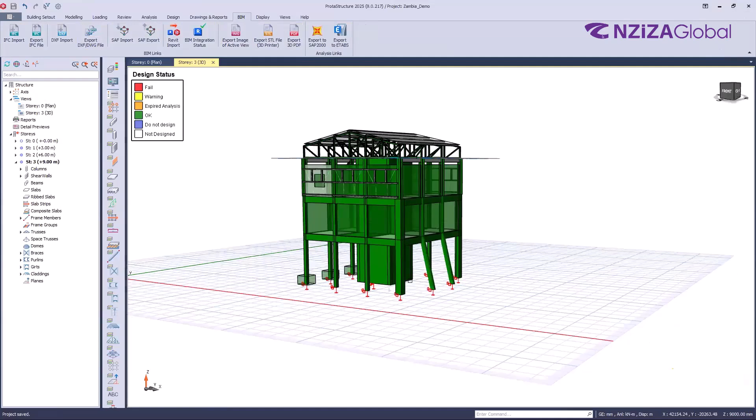You can export it as IFC. But what I want to focus on is Revit integration. You can see I can import a model from Revit. For instance, if you have modeled a model in Revit, instead of doing the modeling like I did, you can just grab the model from Revit, import it to ProtaStructure, and then start modeling.

Let me show you. This is the interface of Revit, just to give you an overview of how it works. If I come here to create new, under the project template, you see I have ProtaStructure. This is 2024, but we are using 2025. I'm in Revit here, not ProtaStructure; this template is a ProtaStructure template. So if I come to the structure tab and click on column, let me open first the plan view.

If I click on column here, these columns are compatible with ProtaStructure families. You can see ProtaStructure L column, and so on. So we have layers in Revit for ProtaStructure. We even have another tab here called ProtaBIM. In ProtaBIM, I can import from ProtaStructure or export to ProtaStructure, so you can bring a model from ProtaStructure to Revit.

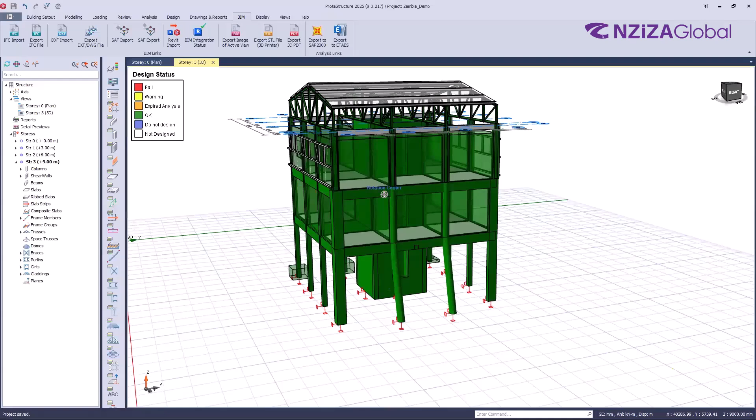For instance, I'm going to import one. Let me see if I can find one. So this is the model we were working on. If I go back to ProtaStructure, you see it is the same model, the one we have modeled. Here in Revit, I'm going to bring it from Prota to Revit. It is the same model. I click on next. It is the first time I'm importing, then click on start.

I'm not going into details here. It will load a summary of what has been done. If I click on close, this is our model. Let me open a 3D view so it will be more visible. So this is the model we modeled in Prota, and now it has been imported to Revit. It works vice versa: you can go from ProtaStructure to Revit, or from Revit to ProtaStructure.

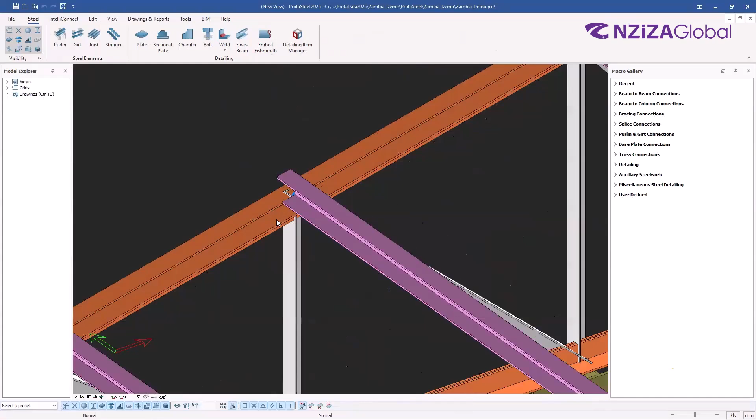So this is a summary of what has been done. I have the model in ProtaSteel here, but you see, between two members there are no connections. If I zoom, here we have what we call macro galleries, with different types of connections: beam to beam connections, beam to column connections. You can come here in ProtaSteel and start placing, modeling, and analyzing these connections. So that's a short overview of what ProtaSteel can do.

Alex, if there are other questions in the chat box, can you let me know? The steel people are answered, because I see many questions about the steel are still coming.

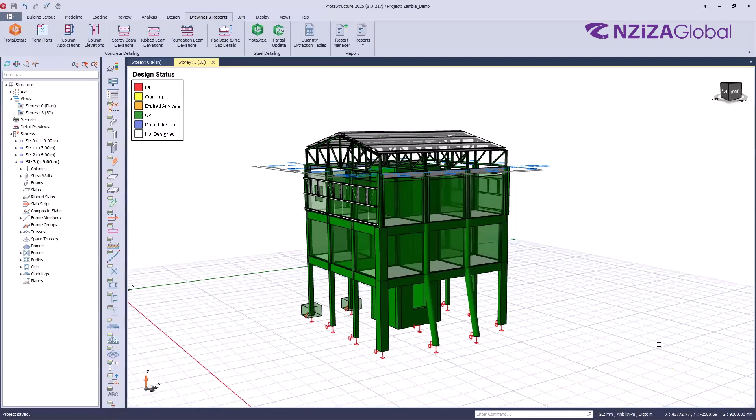So Steria said she's answered maybe about the steel. Okay, there is Chirufia, sorry if I spell your name poorly. He or she asked about importing from AutoCAD to Prota and editing in Prota: no. Other software, yes. Does the software have detailed steel connections? Yes, Steria. It has automated detailing, the way you saw when you reinforced the concrete structure. Like the way it's able to print out reports at the end, yes, it has the capability of automating detailing.

How do you adjust material properties and analyze for reinforcement when it comes to a dome structure? I answered Kongwani that we don't have a dome structure here in this demo. Yeah, we don't have it, but it can do it. You see, you have a steel dome, so it can do it, yes. Also, Saulo asked, how do you apply wind loading? I answered him, it's for tall buildings. I don't know what you say as a technical person. Yes, it is for tall buildings, but it is available.

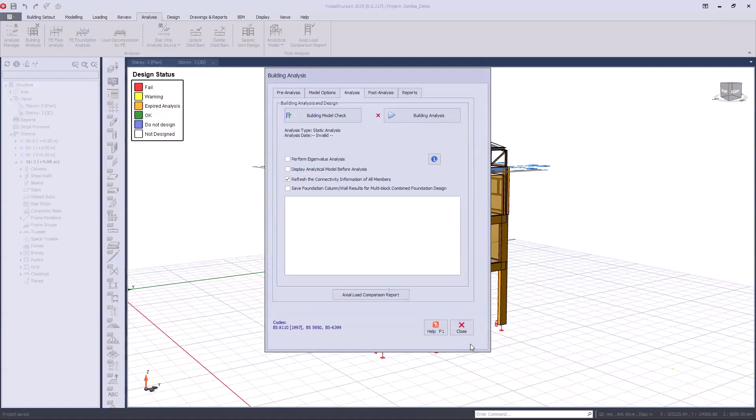Now, if you have that wind information in an Excel sheet, you can put it here. See here, import wind loads. But if you don't, ProtaStructure offers you this wind load calculator, where you set different types of wind settings depending on the location of your building. If everything is okay, then the wind will be applied. So you have to run the analysis again, then those wind loads will be applied to your structure. That's how it works. Okay, that was quick, just to make sure he knows the capabilities within the software.